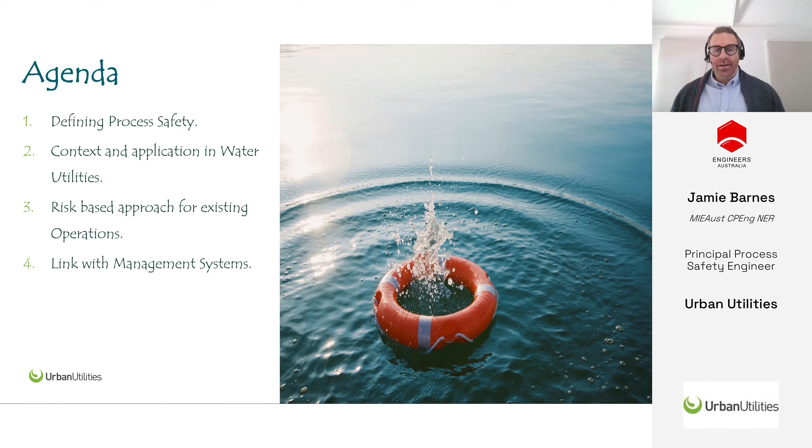So I think the first thing that should be discussed, especially in the context of the water industry, is what process safety is and what it isn't. And I think this discussion is quite important in the water industry because it mightn't be something that's as familiar as, say, in hydrocarbons and mining. But this really powerful, simple slide talks about the difference there.

So with respect to personal safety, people associate that typically with slips, trips and falls. Whereas process safety is quite different. It's usually failure of assets or failure of infrastructure or engineering controls that cause harm. So from that small analogy with the stairs, you can see that the failure of the stairs has a very different mechanism and characteristic than, say, a fall on a stairs.

The other thing that the diagram helps call out is if there's a dozen people on a set of stairs and it fails, then a dozen are injured and potentially fatally injured. Whereas it's very unlikely to have a dozen people injured at the same time from an occupational health and safety event on a set of stairs.

There's another few differences. So with personal safety, you tend to encounter the hazard, meaning you go to it through work. Whereas in process safety, the hazard tends to find you. So one of the most dangerous things about process safety events and incidents is that they're unexpected and they're often sudden. The controls fail, assets generally fail, and the hazard comes out from containment and it finds you. And it's typically referred to as a loss of containment event.

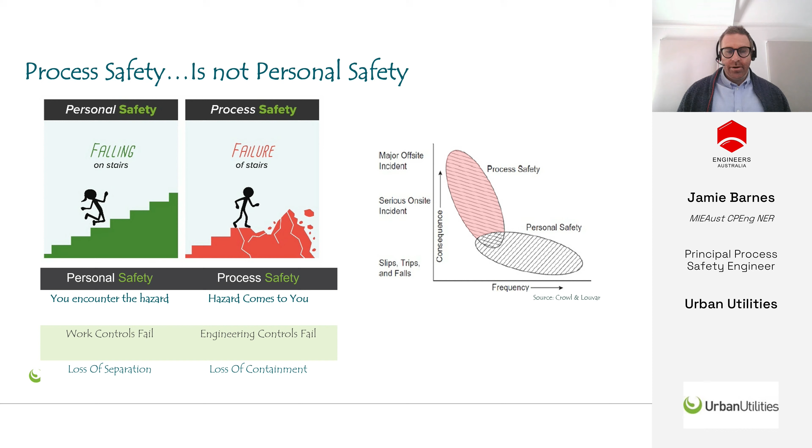So with that in mind, I think it's also important to talk about the definition of what process safety is, and especially in the context of water. So there are a lot of definitions for process safety, and the term process safety management can have certain connotations in certain jurisdictions legally. But I thought it wouldn't be useful today to talk about all the different definitions, but just give a brief description of the essence of what they all sort of say.

And so process safety really is around the systematic approach for managing the integrity of processes. Now, traditionally, that's with hazardous chemicals, but what I want to talk about today is processes with hazardous consequences. And whilst that's only a small difference, I think it makes a large difference in the overall scale and impact of the management. And as we talk about the hazards that are present in this industry, I think that will

make more sense. So for an incident, in the context of this discussion, we're talking about an uncontrolled release of a hazard, a process safety hazard, or the loss of control of that hazard with hazardous consequences, and generally with a serious and immediate risk to human health and environment. So that may occur as a loss of containment, meaning that there's a primary containment failure and a chemical or a hazard is released, or it could be through a loss of control, like a functional failure or a secondary failure that then cascades and causes a primary failure.

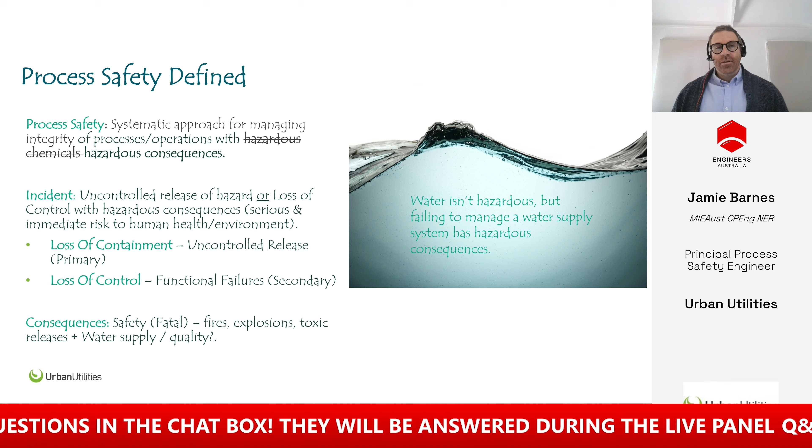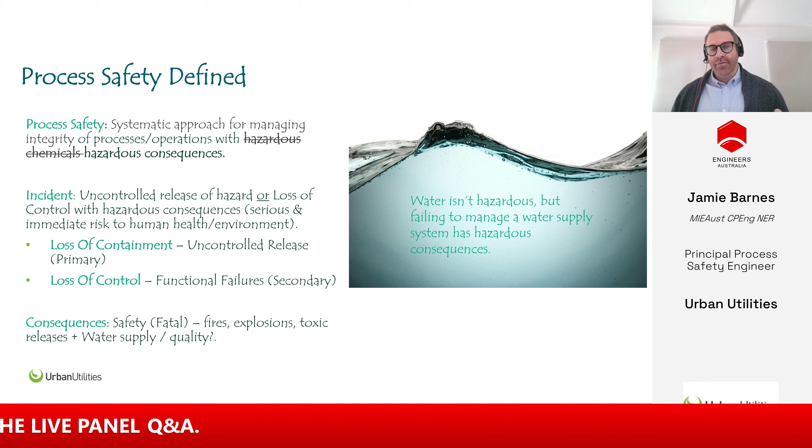But it's just worth pondering that water isn't necessarily hazardous, but failing to manage a water supply system has hazardous consequences. So under that definition that I talked about earlier around processes with hazardous consequences, depending on the scope and the nature of the definition, it could include water quality, and it might not necessarily have to replace it, but it can definitely support it and improve it in some aspects.

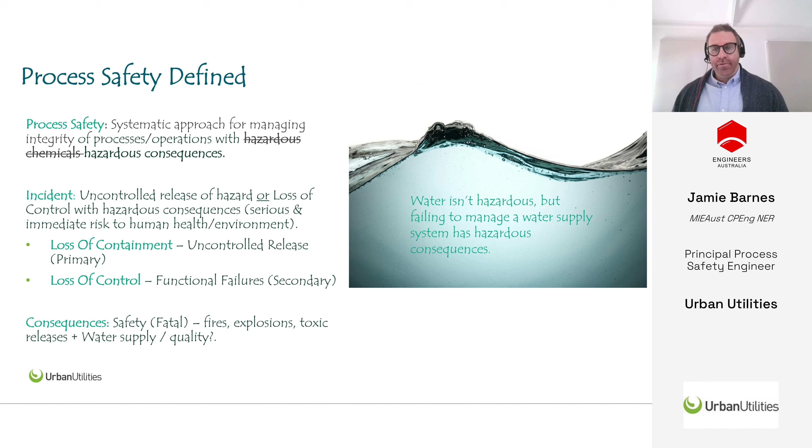So I want to touch on incidents and the concept of foreseeability. The image on the left, most people are probably familiar with, which is Buncefield, which was a fuel storage depot fire in 2005. The one on the right, some people may not have seen. It's a water transfer pump station in Abbeystead. This incident occurred in 1984. Now, to look at these visually, it would be quite easy to think that the one on the left was far more serious, and in some senses it could have been. But what's interesting is that the one on the right had 16 fatalities and the one on the left had 0.

So the foreseeability aspect of incidents is an interesting thing to keep in mind as we move through this discussion around management, because you can't manage risks that you don't understand and you can't manage risks that you can't see. So risk management requires an inherent belief that risks are manageable and that hazards can be found. Otherwise, the entire system won't work.

Now, on the right, with Abbeystead, that was a water transfer pump station where the pipe was offline for a period. There was a coal seam underneath that structure, which people hadn't identified in the design. Gas had come up through the ground and accumulated in the pipe. When the system was turned back on, that gas was pushed through the system to this endpoint here, where people were present, and unfortunately, members of the public were present too. And there were 8 fatalities immediately from the blast, and a further 8 in the 24 hours after that.

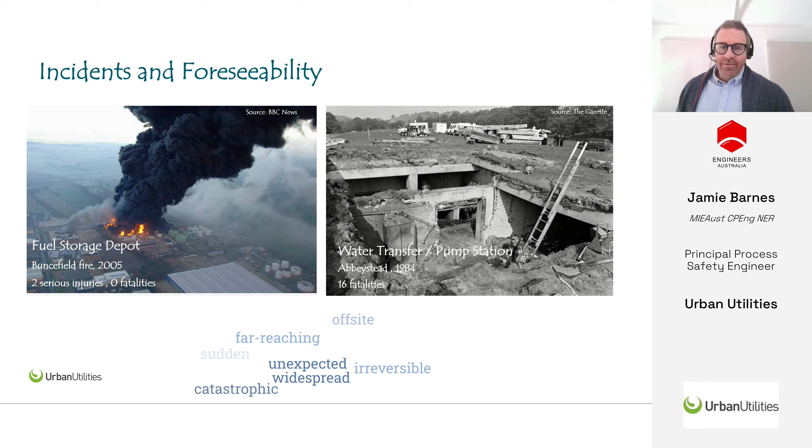And there was a long and lengthy legal battle around the foreseeability and the liability of this. I just think it's very important that we look at that and think about how foreseeable that is, and challenge ourselves around our traditional focus of what some of these incidents look like.

So I want to move into more industry specific now and look at the factors and the processes that we have quite commonly within our industry. So in water treatment, scheduled chemicals are something that process safety management tends to focus on. So for any scheduled chemicals, which are generally referred to in the Work Health and Safety Regs and Work Health and Safety Acts, if you hold a certain quantity of scheduled chemicals, then you can become a major hazard facility.

Now, a major hazard facility needs to submit a safety case to the regulator in order to get a license to operate. And I've just put up here a couple of common scheduled chemicals that are present in water that can trigger that requirement: chlorine, ammonia, and also oxidizing agents such as ozone and oxygen. Now, they're usually quite high, and it's not very common to go over those thresholds. It is worth noting, though, that there's a 10% threshold notification.

So for chlorine, it's only 2.5 tonne, where you would have to submit and notify and have an assessment done to see if that facility meets the requirements for a major hazard facility. And if it does, there's a need for a safety case. So in a traditional context, in a hydrocarbons context, major hazard facilities are very common, and they rely on the process safety approach for safety case management.

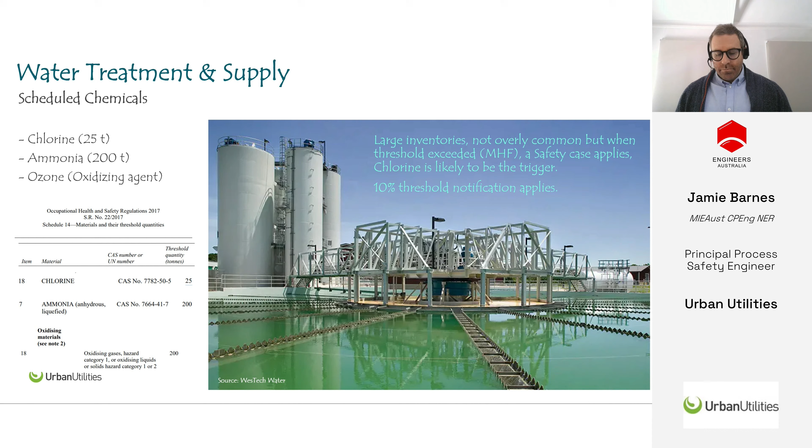In water, we've got a couple of chemicals that show up, and there are instances in Australia where certain water service providers have triggered MHF requirements for chlorine. It's usually chlorine that's quite common, and have needed to present a safety case for that. We look at the other part of the industry in terms of wastewater and sewage treatment. We may also have scheduled chemicals, just as we have on water treatment sites, because we often have effluent treatment as we do in water treatment. But there's a bit of a difference emerging in terms of the hazards due to the nature of the operation.

Now, wastewater and sewage treatment, depending on how solids are managed, tends to have a lot of process hazards emerge in the biosolids management space, and that's generally due to anaerobic digestion. But when anaerobic digestion is present and biogas is present, a whole host of other processes are generally coupled and brought in to make the facility more efficient and more productive. I just want to show this is one of the facilities that we have at Urban Utilities that's been under an extensive process safety review for a number of years.

We have a whole host of different hazards that emanate from the facility, and it's important to note that technology will generally drive the risk here, and methane is a scheduled chemical at 200 tonnes, but you need to hold a hell of a lot of it to actually trigger that, even 20 tonnes at the 10% threshold. Even with biogas storage, it's probably not that common. But that aside, it's about the risk. And some of these facilities become very dense, small footprint, high hazard, or lots of hazards in a small area, which makes the risk higher.

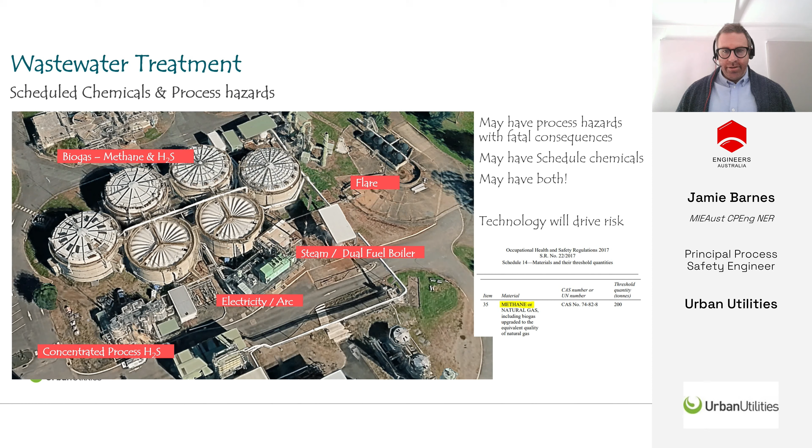So just to bring that together and summarize, it really isn't about hazardous chemicals, or not just about hazardous chemicals. The processes that we operate, depending on the technology and the type of sites that we have, are inherently hazardous. And we're seeing that solids and sludge management processing hazards tend to dominate in that they become like a small hydrocarbon plant. Depending on the scale, we've got steam boilers, thermal processing, cogeneration often in gensets that are coupled up to biogas, and flares as well.

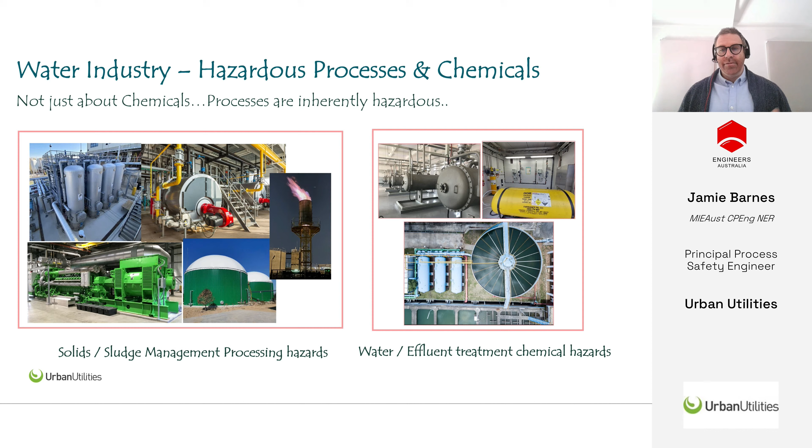So if we bring this picture together on a large wastewater or sewage treatment plant, we can have all of these hazards without the need for a safety case. And they can each be fatal and have significant effects both on-site and in some cases off-site. So it's just worth noting that there's a distinct difference between the hazardous chemicals and the physical process hazards, and they can be present together at that level of risk that's fatal. I just want to draw an analogy. So water and power can be synonymous in the sense that both can have physical process hazards and not chemical hazards, and yet they can have fatal risk.

So for those who may recall the C4 failure at CS Energy, that wasn't about hazardous chemicals. That was very much around engineering controls and physical plant. And in the review for that, some of the failure has been attributed to shortfalls in understanding hazards and managing risk, which is an important part of process safety management.

And as we look at our facilities and how they approximate this type of infrastructure, we can see that we are getting closer, maybe not on the same scale, but we're getting closer in terms of the type of hazards and the type of risk that comes with, say, power generation or power plants.

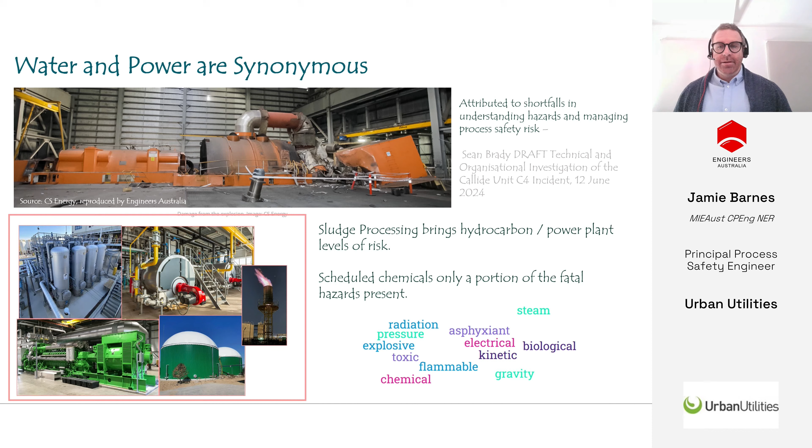So really, scheduled chemicals are only part of the fatal hazards present on a site like a sludge processing site. And we need to understand what the hazards are and understand exactly what risk they present. And just with the word cloud down the bottom, I've got a whole host of different hazards there that can be present at a wastewater or sewage treatment site that goes beyond the typical hazardous chemical approach or definition. So that's worth considering.

As things evolve, we will find that hazards tend to intensify. Now, depending on the future of processing, in particular biosolids management, we've gone from conventional processing through to advanced waste to energy processing, things like sludge incineration, pyrolysis, and carbonization. As we move more towards renewables, this tends to increase.

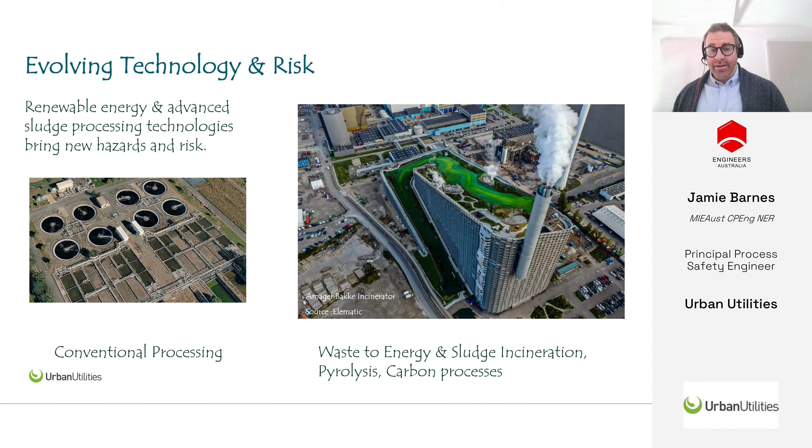And an important consideration with process safety management through hierarchy of controls is, can these things be eliminated? And generally no. So we're going to have really strong and robust engineering controls through safe design, inherently safe design, good operations and maintenance practices that take us into the future to help us manage these hazards as the industry shifts towards this type of technology.

So with that, I just want to touch on what can be done or what to do and approach in terms of, we've just discussed the hazards that are present within the industry. Also in the context of, generally there isn't a need for a safety case because the quantities or the types of hazards don't trigger that major hazard facility requirement.

So I want to introduce the Center for Chemical Process Safety risk-based approach, and they have a really excellent risk-based process safety guideline that's available. And the CCPS put this quite simply. They put forward, ask yourself 3 questions. So in terms of your risk, what can go wrong? How bad could it be? And how often might it happen?

Now, really what those 3 questions are formulating is they're calling for the need to perform a process safety risk assessment. And that process safety risk assessment, in the context of the larger framework that the CCPS offers, is really the basis or the fundamental starting point for management. So on the right, I've got the process safety management system framework as per CCPS. It's made up of 20 elements, 4 pillars.

And you can see that I've circled out here the understand hazard and risk pillar. We have a couple of elements there that are really around process hazard analysis and understanding hazards and assessing and analyzing them. And then on the right, with the manage risk elements, that's really about focusing on what matters and managing your risk accordingly based upon your assessment. So I want to talk more about this overall context, bring a few concepts into the picture, and then return back to this and talk about how it assists with the management approach itself.

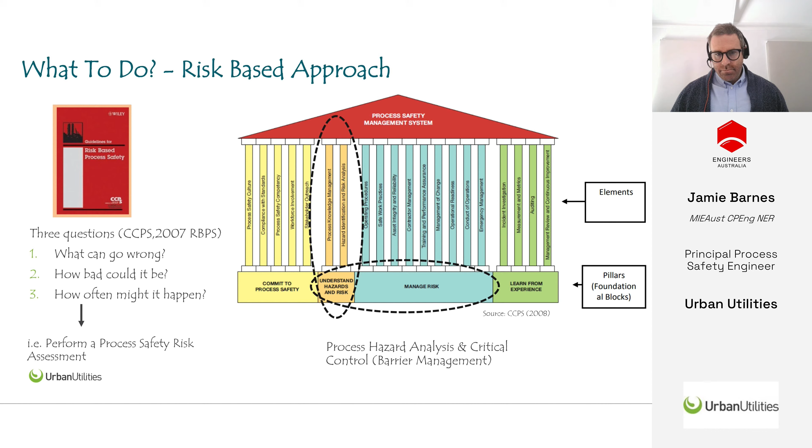So in terms of a risk-based approach, a place to start, as I mentioned in the framework, is understanding hazards and analysing hazards and assessing risk. And the question is, how do we get to what's important from understanding that? Now, people that are familiar with process safety will know what a process safety incident bow tie is. But I think it's really important that we just stop and ask, well, how do we develop a bow tie and what goes into it?

So from that process hazard analysis point of view, back in the management space, you really can't manage risks that you don't understand. So it's really important that you actually go and identify the hazards first and look at how they relate to your organization and how they present in your operations. Now, in a greenfield or a brownfield context, this approach is equally valid, but I want to talk more today around brownfields and existing operations and how that can be applied.

So a hazard ID, which most people will be familiar with, a hazard identification study, typically looks at external factors, interactions between plant, and pulls out hazards that are present on the site and puts to the forefront things that could be fatal. Now, in a hazard ID, not everything's going to have that high level of risk, but you can screen through hazard ID and work out what does.

Similar for HAZOP. For HAZOP, we're talking about internal process factors. So in a HAZOP, there's a deviation from the process intent and then there's an effect. And in the HAZOP, we can quickly determine what relationships exist to cause those things to happen. From those two pieces of work, we can screen them and develop incident scenarios.

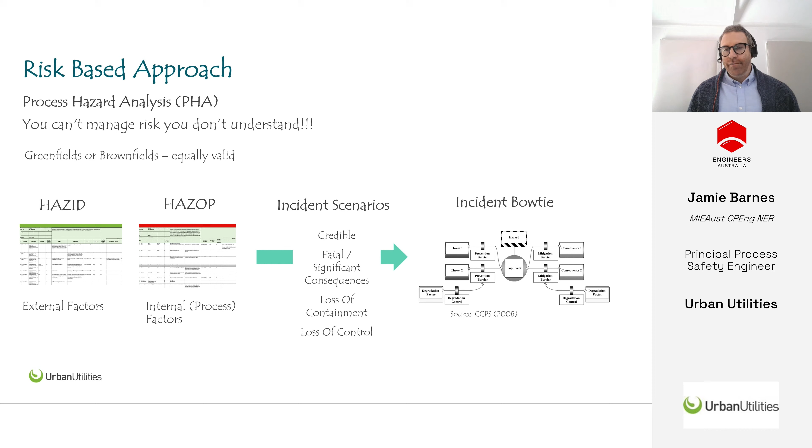Now, introducing this concept I think is important because I want to talk in a little bit more detail about how the bow tie actually works and how it's developed from these studies. You don't have to go through hazard ID, HAZOP to bow tie. They can be done other ways, but I think in terms of a structured approach, this is quite helpful and quite useful as a tool.

So continuing on with bow ties, I mentioned that essentially they're a visual incident or a visual HAZOP. So the HAZOP's really good at identifying the cause and the barrier, synonymous with the word control, both prevent and mitigate. And also the hazard ID is very good at identifying the hazard, the top event in the center, which is the point in time at which you've lost control over the hazard. It's the characterization of the incident, i.e. loss of containment or loss of control. And then on the far right of the bow tie diagram, we've got the consequence.

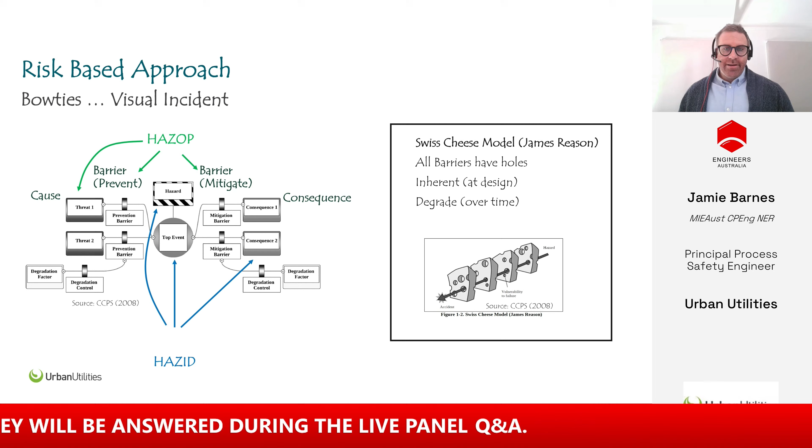So just spending a little bit of time on this quickly. The Swiss cheese model by James Reason is heavily connected to bow ties in process safety management. So it's important to understand that all barriers on a bow tie are not perfect. All barriers have holes. And some of those holes or weaknesses are inherent at the time of design, and some of them degrade over time, meaning that what we do day in, day out, how we operate our facilities and maintain them, has a large influence on the integrity of our controls.

So we need to manage them appropriately. We need to manage change to them, and we need to make sure they remain effective through their life cycle to keep the risk controlled. So looking at the bow tie, I could probably spend an hour talking about how bow ties work, but I think it's important just to touch on this. Looking at the diagram read left to right, the cause is the deviation or the upset or the factor that drives the process safety incident.

Now, with no barriers or controls on the page, the cause basically has to take you through to the center of the bow tie, which is the point at which you've lost control. Now, at that point, there hasn't necessarily been any consequences. There's still an opportunity to recover or to stop the escalation or the progression of the incident through the mitigation barriers. However, if the mitigation barriers fail and you move all the way to the right, you've got the full unmitigated consequences of the incident.

An example could be overpressure as the cause. The barrier may be a pressure relief valve or pressure trip system. It may fail, take you through to a top event in the center where you've lost containment of, say, gas. And there might be an opportunity then to have a mitigation barrier that actually shuts that system down and makes it safe. However, if that doesn't work and there's an ignition source, you could have the full consequence, such as a fire or an explosion.

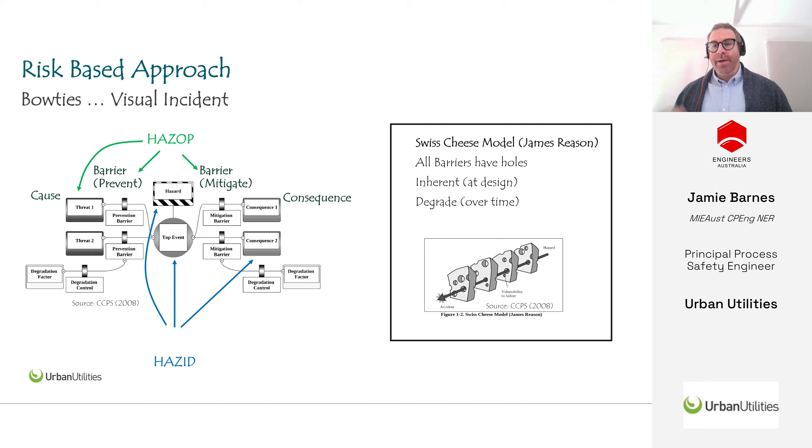So a really important concept to bring together, meaning the Swiss cheese model and the bow tie, which is pretty famous in process safety management, and really to keep in mind that not all barriers are perfect. They require a lot of work in order to obviously design them so they're inherently safe, but then maintain them over time so they remain safe.

Another important point that I want to touch on to bring us right back to that management space and the framework is that the bow tie as a visual really lays out the incident as a diagram so you can see what's happening. Now, the barriers on the page need to be managed to prevent and mitigate the effects of the incident. One of the things that's really important in your bow tie risk-based approach and the barrier management approach is the identification of critical barriers.

So every barrier on the bow tie is important, but some are more important. Those more important barriers are typically termed critical barriers or critical controls. And critical controls or critical barriers have safety critical elements within them. So there needs to be a process undertaken at the point of bow tie development to identify what is critical. And there's a number of techniques that are available to do that.

Once that's done, it's really about looking at those critical barriers more closely, defining how they perform through something like a performance standard or a control standard, and then going about really detailed barrier management to make sure that they're healthy and that they work to prevent incidents and mitigate the consequences of loss events and incidents that do occur. So that whole approach really is often termed as barrier management.

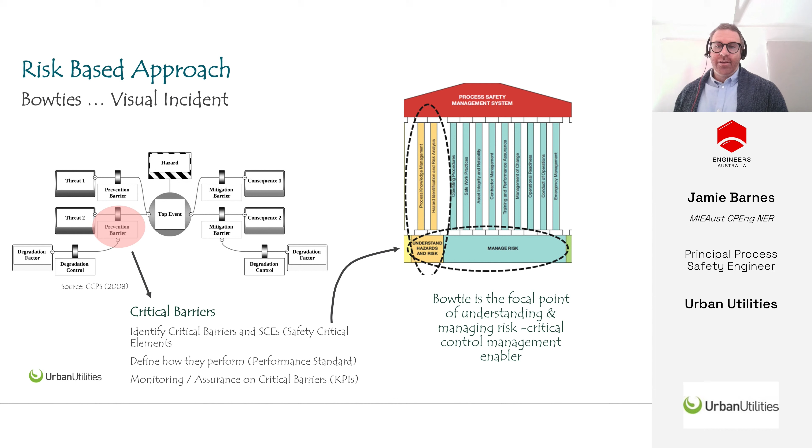And I think this risk-based approach through bow tie and critical control management is at the core of the process safety framework that CCPS offers. And it's really the starting point for process safety management because, as I mentioned earlier, you can't manage risk you don't understand, and you can't perform a risk assessment until you know what your hazards are. And that takes us into the next part of the discussion where I want to talk about how we can actually go about performing process hazard analysis on existing operations.

So we think about the type of technology and the type of processes that we have in water. They're not all the same and they can be quite different. And I think if we're undertaking a PHA across the business, we need to understand the scale of the business, the process hazards, where they are, their consequences, and how they relate to the process safety definition that the business has accepted and set. So in a brownfield context, back to that analogy of really low frequency, high consequence process safety events, some of the operations will qualify to meet that criteria and some won't.

So you may have simple pumping schemes shown at the bottom there where the majority of the HAZID and HAZOP has identified personal safety or occupational health and safety injuries. That wouldn't necessarily qualify to go forward for bow tie assessment because it mightn't be deemed to be a credible process safety incident, depending on the criteria set. So there may be no loss of containment there that's fatal. So it might be screened out and managed through other processes.

But as we move up the curve, we can see that we get into different operations with higher levels of hazards and more risk. And those operations are good candidates to go forward for bow tie and process safety critical control management. So in undertaking this and starting out, I think it's really important to acknowledge that not all operations have process safety hazards. And that's an important thing to communicate early on because it can be overwhelming to look across the entire business and think undertaking process safety management means I need to apply the same depth and rigor to everything everywhere. And through the flexibility of a risk-based approach as per the CCPS, it's really not the case. It's worth focusing on what matters and focusing on the controls that save lives in those operations to give us the most risk reduction where we need it.

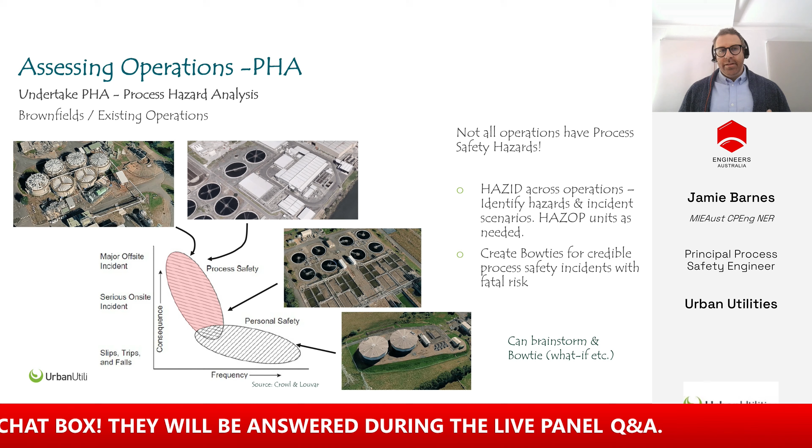It's quite powerful. I think the key takeaway here is start with caution, recognize that not everything has the same risk, and focus where that risk is the highest. And in order to do that, you need to start with hazard analysis and probably look across the entire business. And inherently, a lot of people will know where this risk sits because they work with it every day. But through a structured process, you can definitely fill this picture out and move from there.

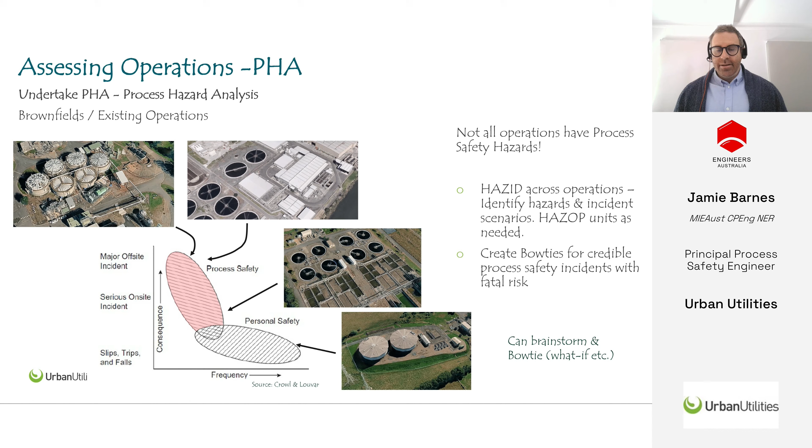And from that identification at a facility level, you can pick those scenarios out, build the bow ties, and then move into a register, as I mentioned earlier, around critical controls, so safety critical elements. And you can start to get a picture of what's critical. For starters, what incidents do I have? What controls do I have? And then based upon critical control identification, what's really important to manage those hazards? And then from that, it allows you to move into the management of critical barriers, which is the most essential step in the risk management approach.

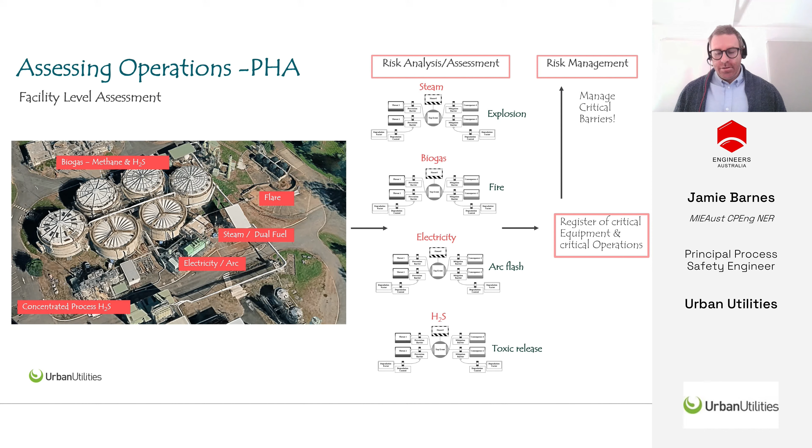At a business level, if you've got a number of sites that have process safety hazards, you may have a number of bow ties for each facility, and they can be rolled up into the site risk register, but also that information can flow through to the site and the corporate level risk management processes. And that's an important piece around integration because some of these assessment techniques are quite specialized in terms of HAZID and HAZOP. They're quite engineering focused and they're technical.

And everything I've talked about to date has only been a qualitative risk assessment. But in some cases where risk is found to be very high or there's a lot of uncertainty, there may be the need to quantify the risk further. So the value in the bow tie is that you can understand the incident and see essentially what's going on. And you may wish to work that up into a quantitative assessment and actually quantify how many layers of protection do I have, what sort of reliability do all of these barriers have, and what risk target do I need to achieve for this facility. So bow ties are a great opener to move from qualitative to quantitative risk management.

Not a focal point of the discussion today, but for anyone that's interested, I think it's worth looking at layer of protection analysis and how that fits in with bow ties and bow tie management and barrier management.

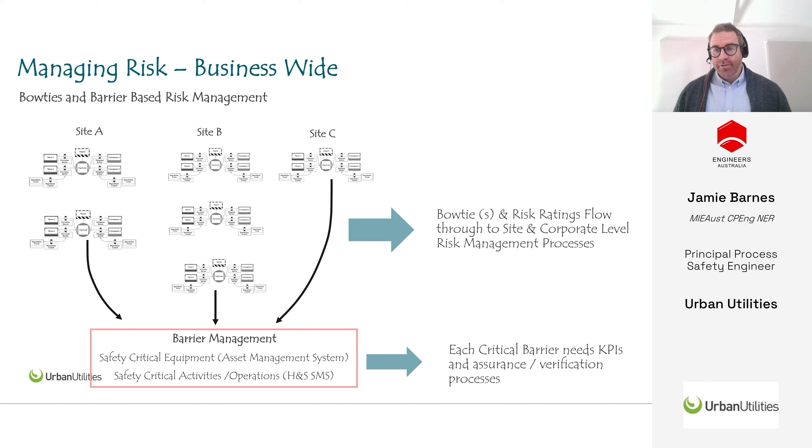But it's important to note that if we're moving into barrier management and focusing on critical controls, we definitely need to ensure that we've got appropriate KPIs so we can have critical control management and look at that assurance and verification process.

And just another thing I just want to touch on: systems. So we just talked about the relationship between the health and safety management system and the asset management system for barrier management. But there's another piece just to bring together here. So ISO 31000, generally most businesses operate to that accepted risk management framework. The bow tie has a really important and unique role to play in process safety management to support the ISO 31000 approach. So looking at the 31000 flow, the risk assessment piece in the center really starts to relate to the bow tie.

And you can see from this diagram that identification, analysis, and risk evaluation are all things that we've talked about in the context of HAZID, HAZOP, and bow tie. And they couple in directly with that part of the framework for those types of assessments and those types of hazards. So 31000 can be leveraged to support process safety management, providing the right tools, i.e. the bow tie, are brought in and used appropriately to do that.

With the risk treatment aspect of 31000, it's important to look at the requirement to understand how many controls are enough. And once a bow tie is visually laid out, that's an easy thing to understand, much easier to understand than having that in a spreadsheet.

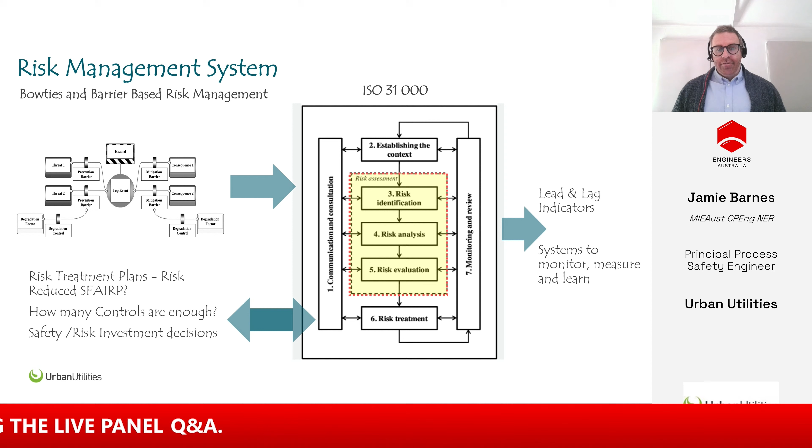And the bow tie becomes a discussion point for talking about safety and risk investment decisions and also risk treatment plans. So under the Work Health and Safety Act, there's a requirement to eliminate risk or reduce risks. This tool and this framework gives us the basis to go ahead and do that and understand exactly what we're talking about when we're saying we need to add controls or change the way that we operate to control the risk.

And on the right-hand side of the diagram, I just really want to call out that the monitoring and review part of the framework really calls for process safety lead and lag indicators and KPIs to be set and monitored, and that there is a system of work to monitor, measure, and learn from what's coming out of that, because you can't improve things that you're not actively measuring and monitoring. And the understanding that comes out of that, it's important that's carried through to monitoring and performance review.

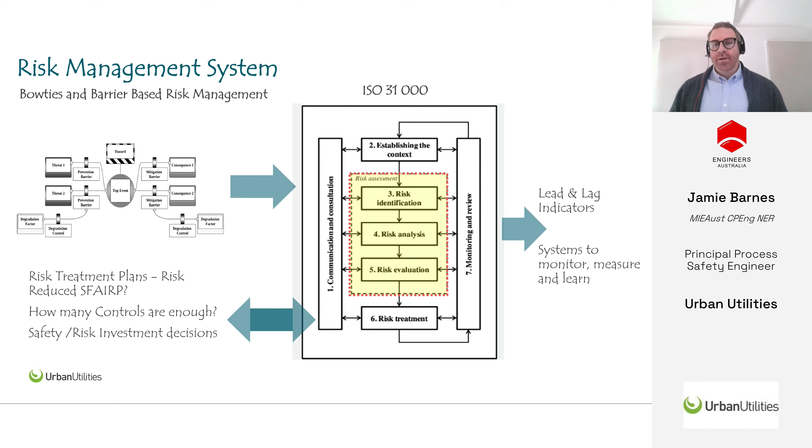I just want to return back to the crux of the discussion, back with the CCPS framework, and bring it together. So I think an important point here is I've talked a lot about bow ties and HAZID and HAZOP, and the reason for that is because you can't manage risk you don't understand. So you need to start with the understanding of risk and the hazards. However, don't forget the rest of the framework. There is an entire framework here of 20 elements that make up a really, really useful management system in order to manage your risk appropriately.

And it's very important to start fundamentally with understanding risk and focusing on what's critical, and then improving systems over time through the adoption of the principles through this framework. Now, there are a number of frameworks that can be used. This framework is quite useful, has a lot of flexibility. It's not the only one, and it may not fit your organization, it may not suit it, but it's quite useful and very practical with a lot of guidance material.

A lot of companies may choose to roll out elements one at a time, or look strategically at what fits best and how you pull on parts of that management system to get the most bang for buck. So in terms of rolling out sequentially, as I mentioned before, the most important thing is to understand your hazards and manage your risk. So it makes sense to start with risk assessments and process hazard analysis to get that information and understand it.

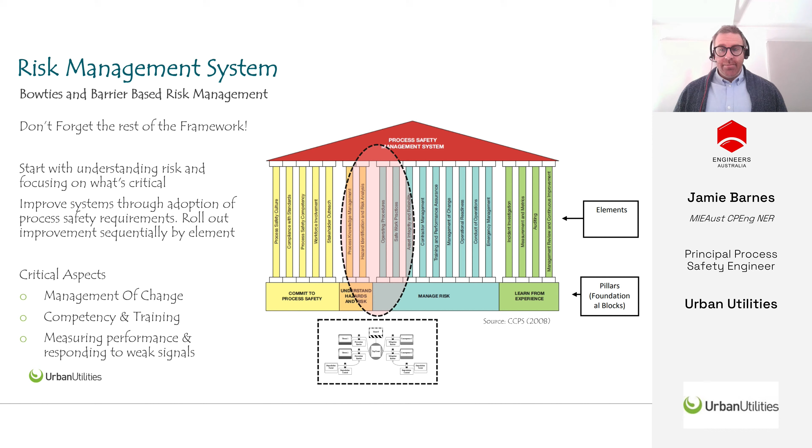And then another one, just measuring performance and responding to weak signals. Lead indicators are really valuable, and they can stem from barrier management in terms of critical control management and verification processes that can pick up things ahead of time before they fail and cause incidents. So the whole framework is very, very important. Whilst I've focused on just a small part of it, there's a reason for that because it's useful. But I think it's really important to bring together the picture here and look at the entire system.

I just want to close with a final slide. So I just want to touch on these key points to bring together everything that's been discussed and just sum up the essence of the discussion. So right at the beginning, we talked about the difference between occupational safety and process safety. It's really important to understand that personal safety and occupational health and safety doesn't control process safety risk. It just inherently doesn't have the right approach. And whilst it's very much related and it can go a long way to managing common hazards, it really isn't going to deliver some of these detailed technical aspects that are needed to fully manage your process safety risk.

The definition of process safety drives the operational scope and the entire business focus. So starting with hazardous chemicals and just viewing loss of containment, that's a very useful way to look at process safety risk management, but it may be too limited depending on what's happening in your business and your operations. So if you've got process hazards that are fatal and you've got operations that have loss of containment and loss of control risk, it is worth looking at expanding that definition and how that fits.

And also the discussion earlier around water. So drinking water quality management is quite critical. However, process safety can support and assist the management of water quality and safe water as well. The water industry has numerous hazards with fatal potential. We've just looked at the different technologies and how those technologies will emerge over time to create potentially more hazards. And those hazards are both process and chemical. They're not just around hazardous chemicals.

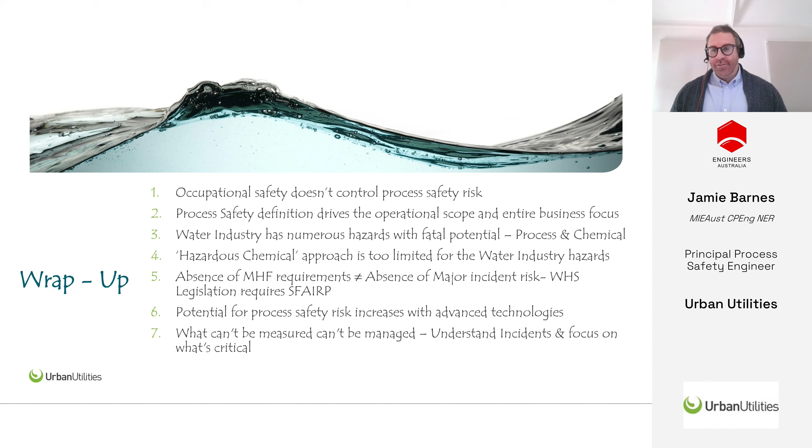What I might do to kick off is start with one of the questions that we received from registration. This one came through from Lucas from Queensland. The question was, what PSM management tool, enterprise software, is used by industry to manage PSM critical maintenance and inspections, Jamie?

Okay, thank you for the question, Lucas. I can talk a little bit about what we've done and what we're continuing to do. In that space, from the bow tie assessments, we've got a computerized maintenance management system known as Ellipse. We've gone into Ellipse and put safety critical element flags on equipment associated with critical barriers, and then built Power BI dashboards that can track maintenance completion rates on critical equipment. So that's one important step that we've taken in the maintenance and inspection space.

The other thing we're looking at and we've started on is training people on safety critical activities for certain maintenance tasks that are related to the integrity of safety critical barriers. But the other stuff that we have looked at and continue to look at is the use of our enterprise GRC, or governance risk compliance system, for management of change. And we're using Bowtie XP software, and we're integrating those two together to try and complete that picture.